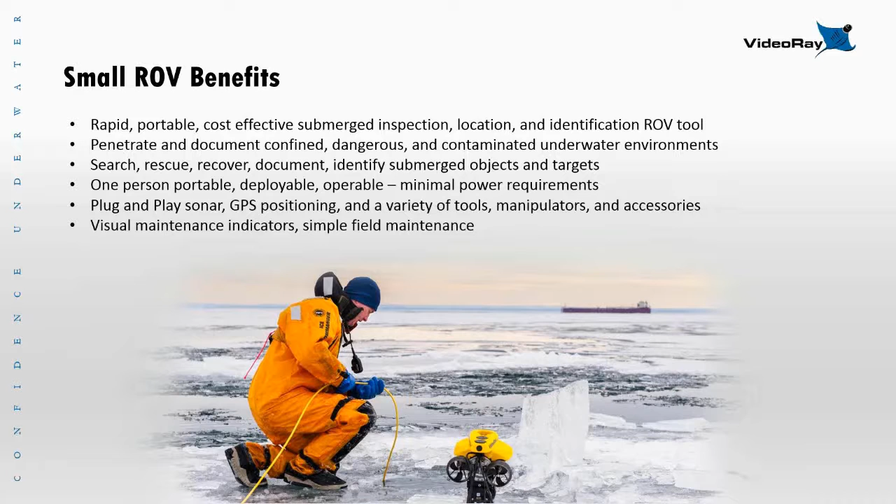An example is the cartridge seal, which is the oil-filled seal that lubricates the motor shafts. It's visually identifiable - you'll know when it's time to change it, and changing it takes a matter of seconds. So we pride ourselves on the ease of maintenance of our vehicle.

The third one is a new ROV configuration that we've put together. We're calling it the Voyager, and it's going to live in our economy line. So we're going with the Scout, Explorer, and the Voyager, and you can probably notice the theme we have going there. So we're kind of bridging a gap in performance and price between our economy line of entry-level systems, the Scout and the Explorer, and our top line Pro 4 professional system. We'll go into that in greater detail as well.

We'll start with the rotating manipulator. Many of you know, if you're familiar with our systems over the last 15, 16 years, that we've had our single axis manipulator - varying opinions on that. So needless to say, we're very excited to have something new and much more capable than our good old buddy there, the old manipulator. This was designed, as was the old one, by Inuktun.

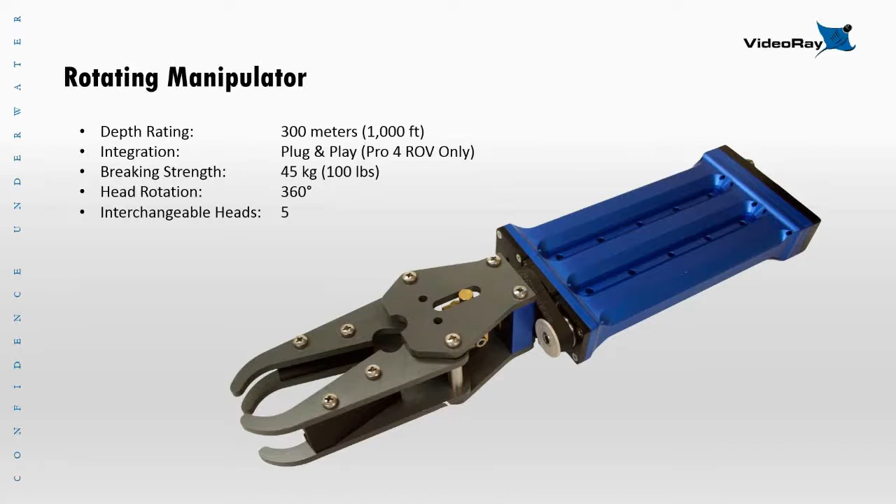So we'll go through those heads now. Starting on the left, and the interchangeable part, you'll see there's 4 screws involved, and then kind of an Allen key. So I've switched out all 5 heads, and each head probably takes 2 to 3 minutes to switch out. You can do it out in the field, so it's not very difficult at all. It's a Phillips head screwdriver and an Allen key, which come in the kit for the manipulator.

Right now we're selling this as an entire kit, which is the body and all 5 heads. I will talk a little bit about pricing at the end, and how we're trying to figure this out since it's very new to us. Are we going to sell it with 1 head? Are we going to sell it with all 5 heads? We're always trying to be flexible and meet our customers' needs, so with your help, we can probably get that dialed in.

On the left is a parallel jaw. It's kind of similar to the old head that we had on our manipulator. Simple open and close on that one.

Moving to the right, we have the V jaw. It consists of 4 kind of fingers there that interlock and opens very wide. The difference between that one and the parallel jaw is how far the heads are opening, and I've got specs on that on the next slide, but let me get through these basic overviews here.

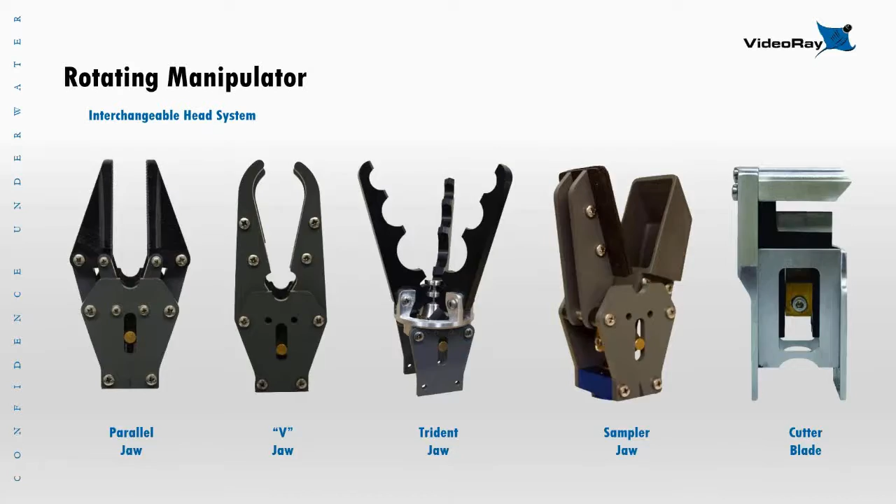Here's some of the specs, and again, I'll make this presentation available afterwards so you can look at this in more depth. Or you can visit our website under the options and product tab, and download the spec sheet for this manipulator—all of this is on it.

You can see some of the closing forces for each individual head. The sample size—you can pick up 45 milliliters with the sampler. The opening on the cutter blade is about 1 inch. Now, I don't think we're getting through 1 inch of steel cable with that, maybe some much thinner steel cable. I've yet to really play around with that one myself, but I know we can get through thick nylon rope and stuff like that. The thing is really beefy.

Feel free to go to our website and download the rotating manipulator spec sheet, and all this information is on there.

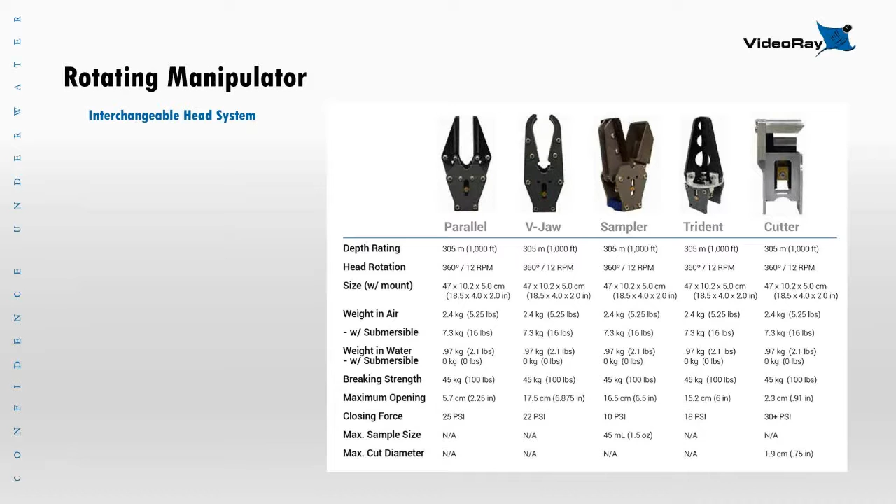On the left here is showing how we're working the rotation. We have the same open and close features, which your right hand, forefinger, and middle finger will still operate, as it did with the old one. But we've added the rotation of the manipulator head into that 3rd axis on the joystick—so it's not moving left and right, but twisting clockwise and counterclockwise.

To operate or engage the rotating feature of the manipulator head, it's very simple. While piloting the ROV with the joystick, it's a simple left or right if you need some rotation feature there. Works really good. I've used it a few times now, and it's something to get used to, but if you work with it in a pool for a little bit, you can really pick it up quickly, just like pretty much everything else on VideoRay.

I wanted to point out with the image on the right that this is compatible with the imaging sonar head. If you want to put it on with an imaging sonar head like the M900 BlueView, we do have an extra flotation block that's necessary to put on there. It's just a couple of screws on the bottom into the skid, giving you the correct ballast and trim in the water, because the rotating manip is a little heavier than the old one. But there's nothing we can't ballast correctly with the tools we already have. So the only one that requires more is the Blueview—just that blue kind of block you see there. So yes, to answer those questions, it is compatible with the imaging sonar, and also the Micron or the Sea Sprite and things like that. So it plays nice with everything.

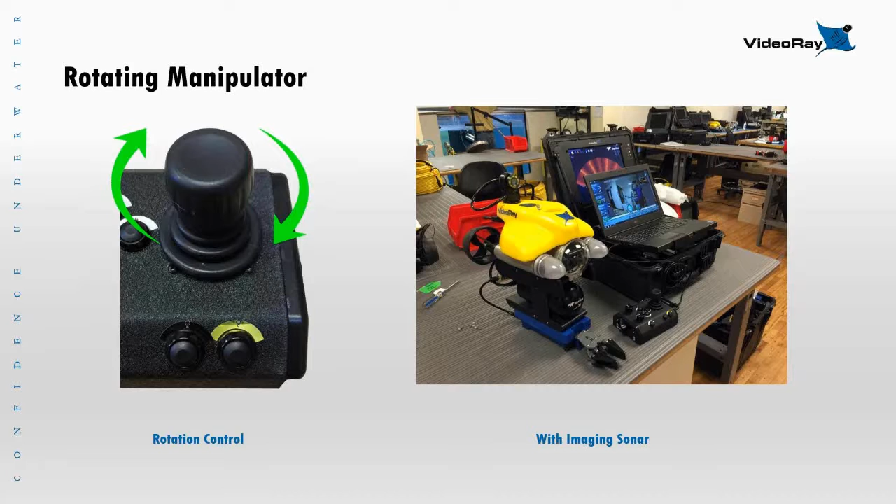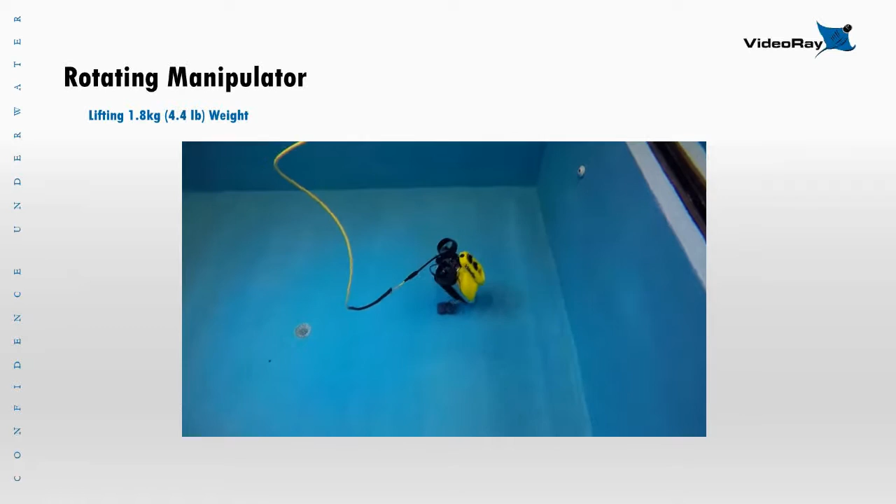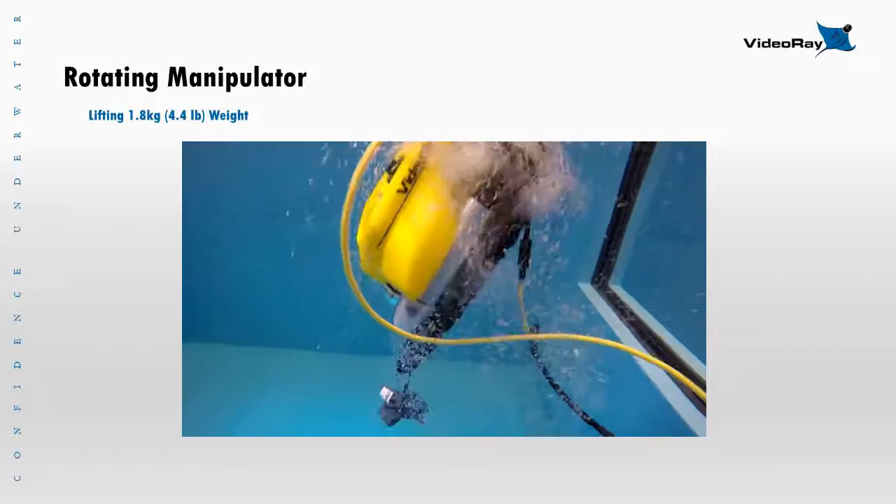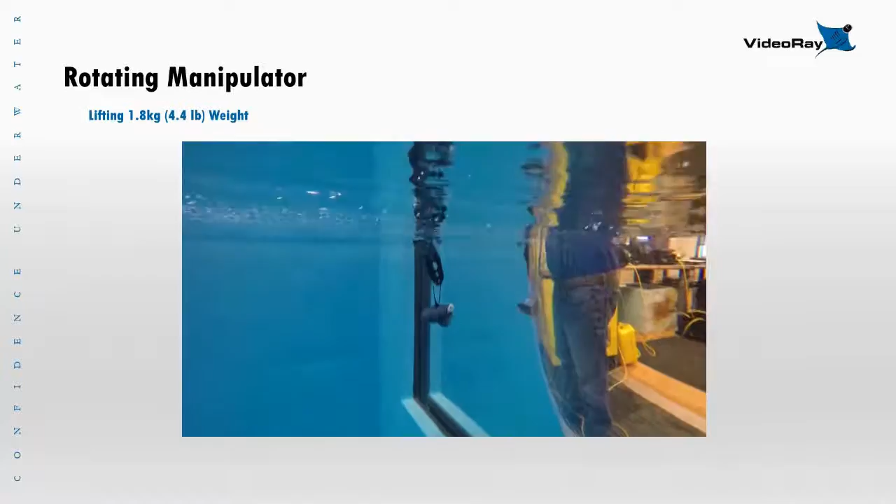I had two little short videos on the rotating manip. We had to meet a spec for a tender that had the ROV picking up at least—the spec was 1.5 kilos, but I pushed it up to 1.8 and used the new rotating manip to actually pick up some dive weights that maxed out at 1.88 kilos, 4.15 pounds, which is quite a bit for our system. I did this in our tank downstairs using the rotating manip. These are just lead dive weights with some zip ties on there, but I'm also using a ballast technique and the horizontal thrusters to lift that instead of the vertical motor, which isn't powerful enough to lift up that much weight. We did use—and you can see there I'm holding that weight at the surface. So this was a cool test. That's probably about the max weight we can pick up under just the ROV power, so that's a neat spec for the size of our system. I was pretty impressed that we could get that much weight up, and there's a view of our shop here.

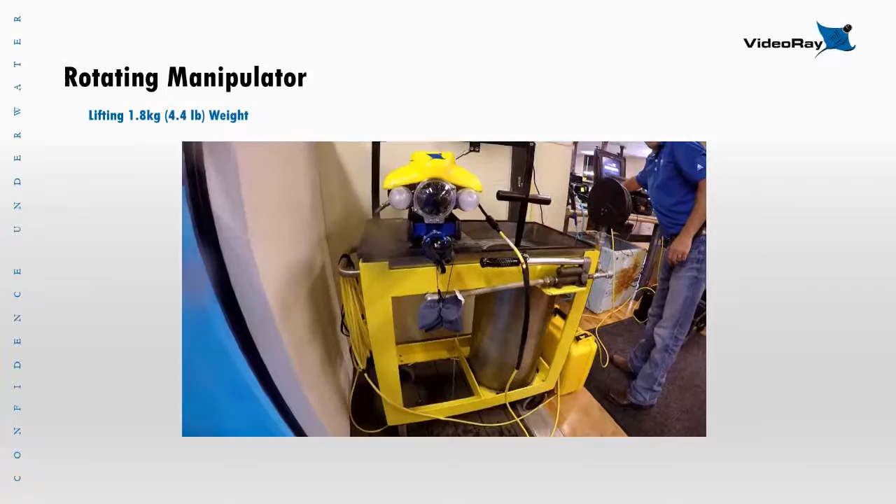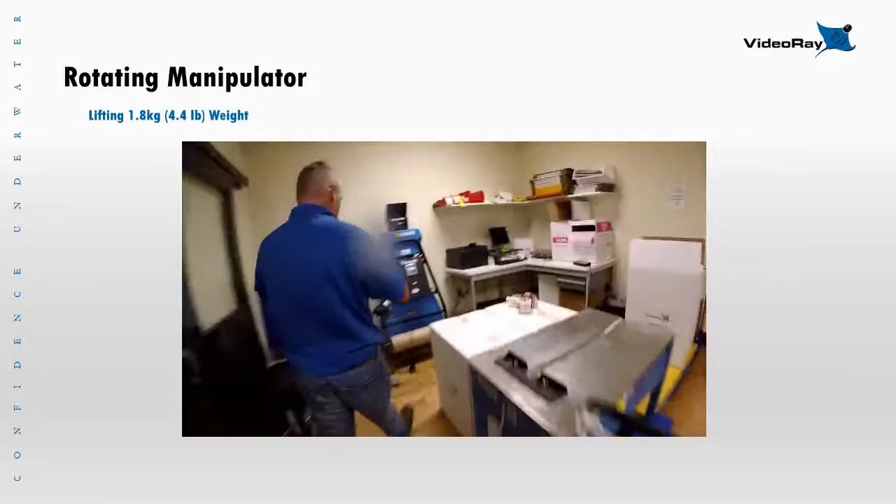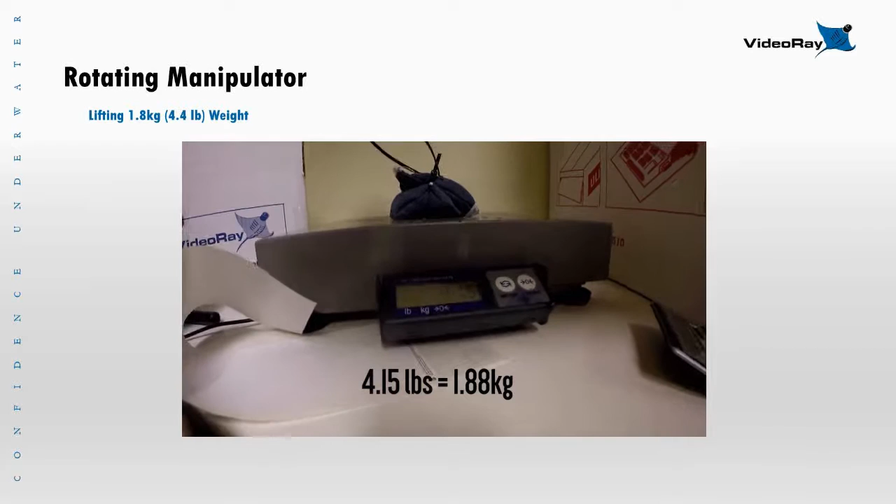You can see me—I'll take it over just to prove that it is that much weight. Sorry if the video is a little jumpy there; I'll clean it up at the end and resend it so you can see it working in real speed. That's our scale and our shipping area there, in pounds. So I thought that was pretty cool.

Okay, that's the rotating manip. Again, you can come to our website—there's a whole page on it. Everything I mentioned is in writing form, and you can download the spec sheet, and so on and so forth.

All right, we'll move on to our second new product. Like I mentioned before, it has been around in a couple of different forms with some of our ROV tinkerers out there. This one was put together in a package by a fellow named Patrick Rowe—he's Midwest ROV—who designed and put this kit together, and it works so darn well that we really want to start promoting it more. I'll show you some videos of successful recoveries completed by Craig Thorngren of Submerged Recovery. He's out in Washington State, and he's picked up crazy things with this recovery toolkit, and I'll show you some examples of things he's picked up with this kit. So thanks to Craig and Patrick for some of the content here.

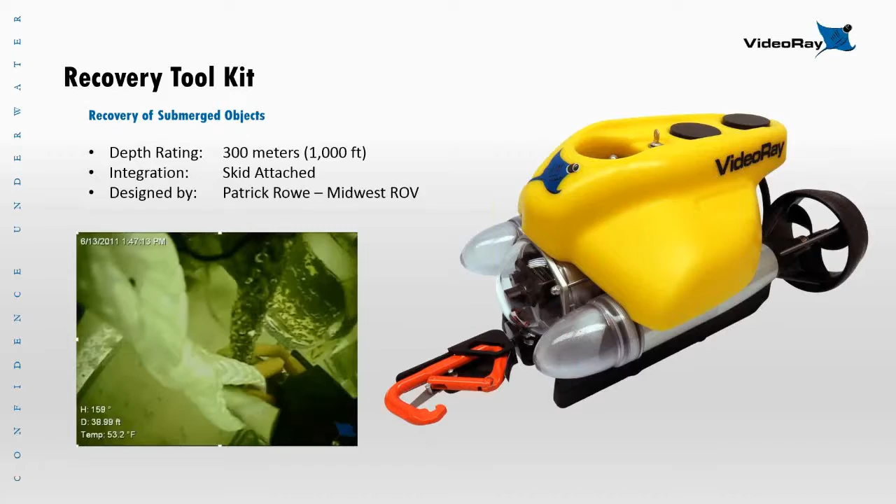So what are we doing with this here? Now there's a lot of different kinds of tools in this kit, but I'm going to focus on one called the 2T recovery tool. Very simple but extremely effective tool in this kit.

But what are we doing overall with the recovery kit? We mentioned that we're able to pick things up to about 100 pounds if we have a good grip with the regular or rotating manipulator, bringing it to the surface by pulling the tether up, hand over hand, muscling it up. And what if we have something that's too large, we can't get a good grip on it, and we need a much more formidable rope or line on something to get it to the surface with either a crane or some kind of winch, launch and recovery tool.

So what we're doing with the 2T recovery tool in this kit is attaching a separate line to the target item, the submerged item, that we can recover with a LARS or a crane, something like that. We're attaching an external line that's flying down with the VideoRay, attaching either the carabiner or one of the clips to the submerged object. We're backing away, so now we're free of our line, and we can stay down and have a visual of the recovery. That's kind of the steps involved with the recovery toolkit.

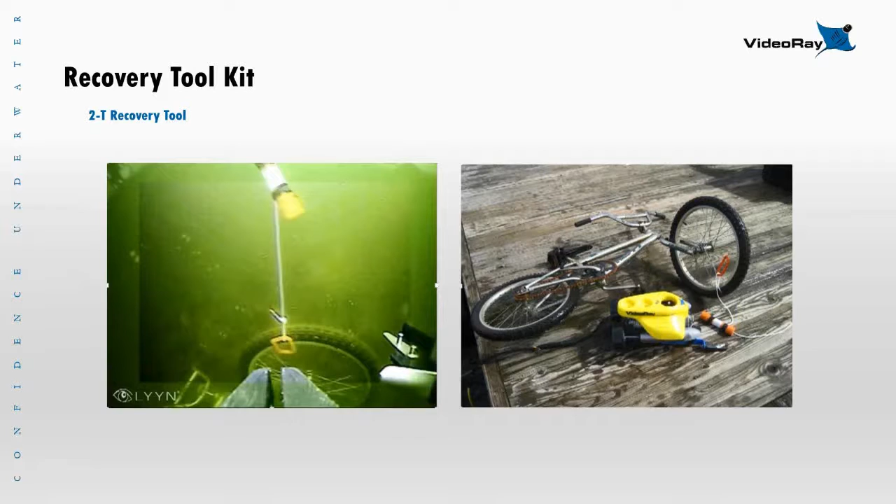Thanks. Here's a close-up of it. It's a very simple device, but this was put together very well by Patrick. You can see the machined clamp there, with the carabiner that's inserted in it, and basically you're using the spring motion of the carabiner there.

You're opening it up and just closing it. If you can see my cursor there, you're just pulling this in and closing. So when you've found what you want to recover and found a good spot to get it on, you simply insert the line or whatever the structure part is. This snaps, this closes, and the whole carabiner and line pull apart from the recovery tool. So very simple, very slick, yet very effective.

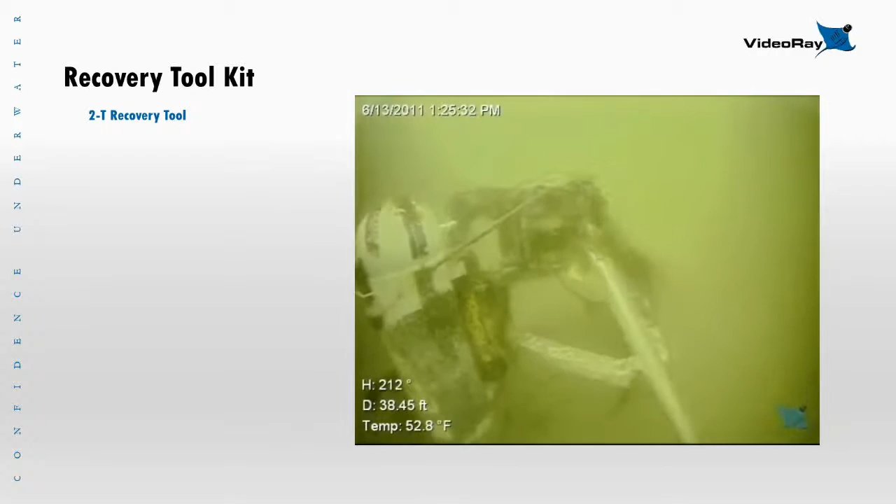So you can see they've located the item there, which was done with sonar, BlueView sonar I believe. The next step is to find a good point for recovery, and it looks like there's some rope on there already. So he's now attached his recovery kit, and you can see the line attached there to the carabiner, which is loaded and still trapped there. So I've identified the point there, and I believe there's some good rope on this already that we could get around, or that Craig could get around to attach the line.

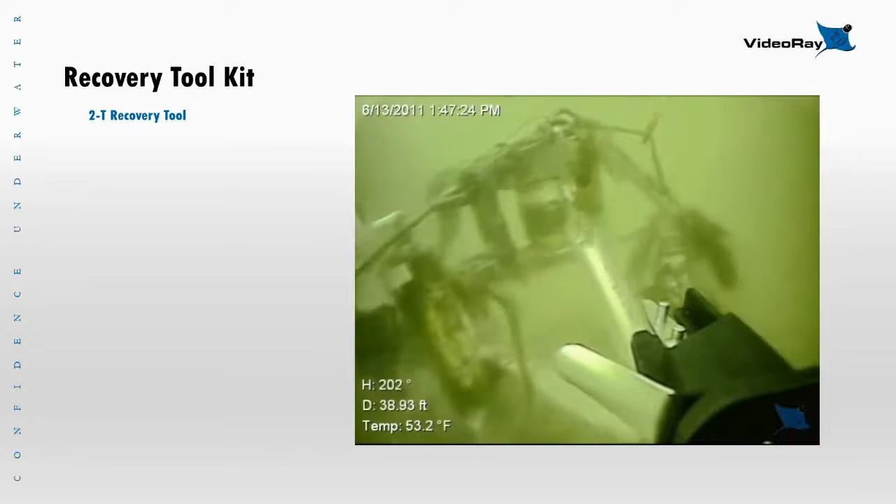With some good piloting, he's going to get up on the system there and get his carabiner caught around it, go full flaps reverse, snap off. So now you have the recovery line on the system. They had some kind of winch or LARS on the workboat they were on. So you can see there that float was designed to keep the line away from the thrusters.

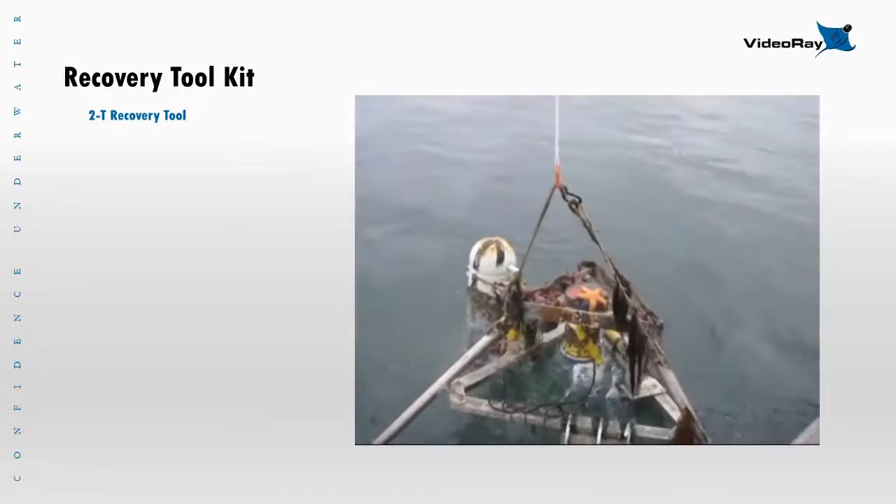Looks like they're locked on good, and they pulled this up, and I believe there's a picture of it coming up here. I can't remember the weight of this. I'm guessing it was over 100 pounds. But you can see they're using their LARS to recover their system, and there's proud Thorngren with his tools and his gear he recovered.

So good video there to show the simplicity and the effectiveness of this tool. Here's just a few more things he recovered. I think that bike is in there, and some other stuff. Craig likes to pick up sunglasses and cell phones and all kinds of things. So this was the bike.

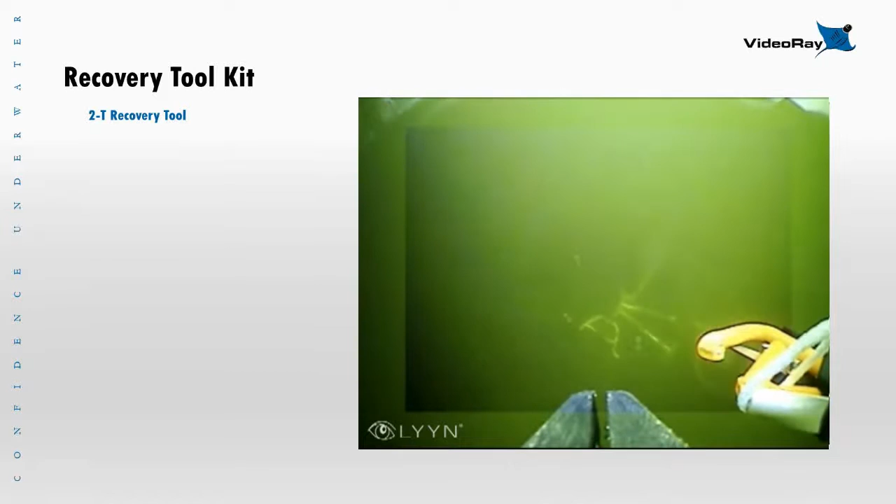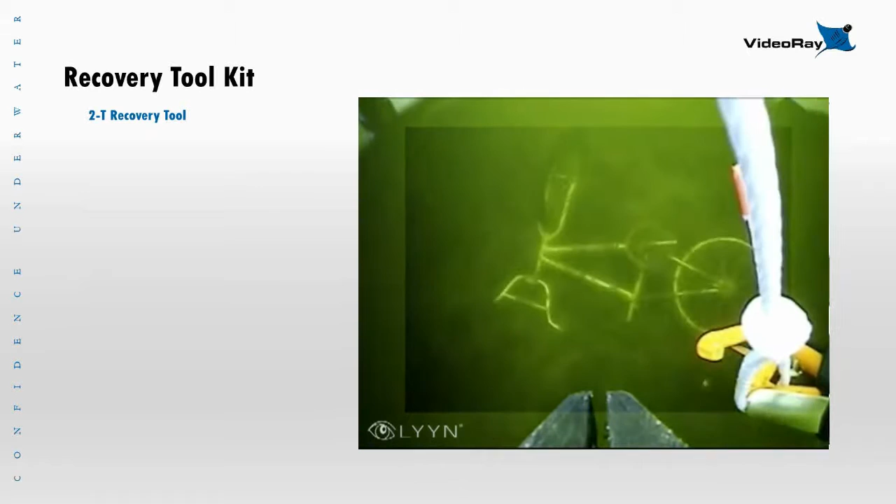So in this one, he's got the recovery tool side mounted. The good thing about this is that you can mount it in a bunch of different places on the ROVs. Obviously, you'd want it in the view of your camera. So here he's got it side mounted, so he has both ability to use his old manipulator and the recovery kit as well. So getting a bike up is probably perfect for this. It looks like a lot of different places that you can snag your carabiner onto.

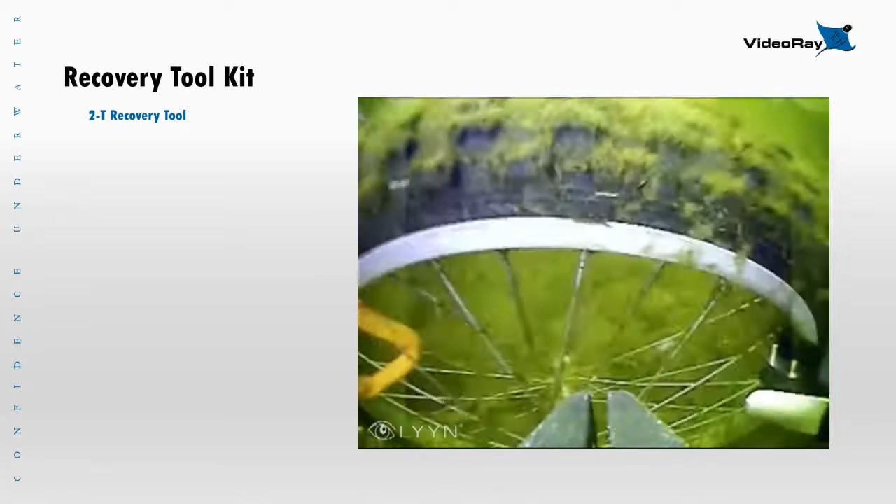But now Craig has done a lot of recovery of not only this type of stuff, but also drowning victims as well. And he's crafted all kinds of little tools for this, and I'm sure he'd be happy to talk to you about them. I'll give you his information afterwards as well. Snares for drowning victims that are just too deep for divers to get to. Snares that you can wrap around some sort of limb or something to make drowning victim recovery possible at depth.

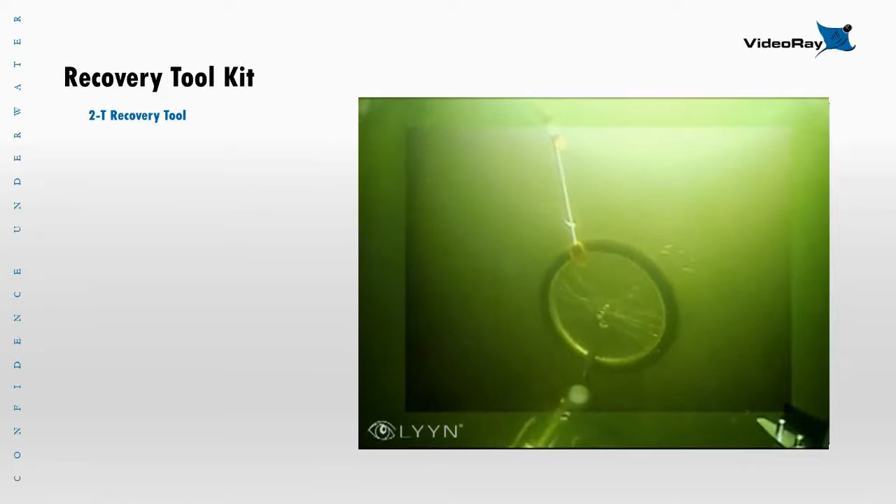Now you can see here the bike coming on up. There she is. And I think now he's just on his manipulator picking up cell phones and beer bottles. And so the manipulator is a handy tool, to say the least.

I'd say it's probably one of the most essential tools to have on the VideoRay, and you don't have to buy the Pro 4 system with it right off the bat. It's something you can add at a later date, and obviously the same as the recovery toolkit. So something to think about if you're getting ready to purchase a system.

The ability to upgrade at a future date is as simple as just purchasing that item. You don't need to send it back to the factory. We don't need to install anything for you. It's there when you need it.

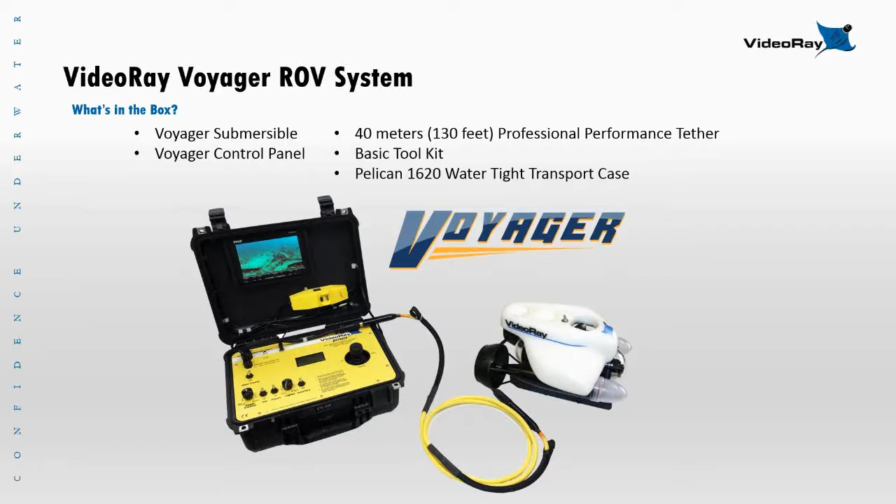Sometimes you can get the Explorer or the Voyager control panel inside the same case as the sub. So it basically gets you down to your tether, which is less than 10 pounds, and your sub case.

So a little bit more about the submersible itself. We went over the depth, speed, and the submersible weight is around 6 kilos or 13 pounds. That's with full ballast weight in it. So depending if you're working in salt or fresh water, that can change.

Same camera as our Explorer, the 570 TV lines with a 140-degree diagonal view, so very wide, underwater optimized camera. Again, there's a depth sensor in this sub that can give us our depth on the LCD readout of the panel. We have the variable intensity 20-watt halogen lamps, so you can turn them up and down as needed. The same skid ballast weight system as all the subs, so no tools required. You pop open the hatch there, add or subtract weight as necessary to get your trim characteristics right in the water.

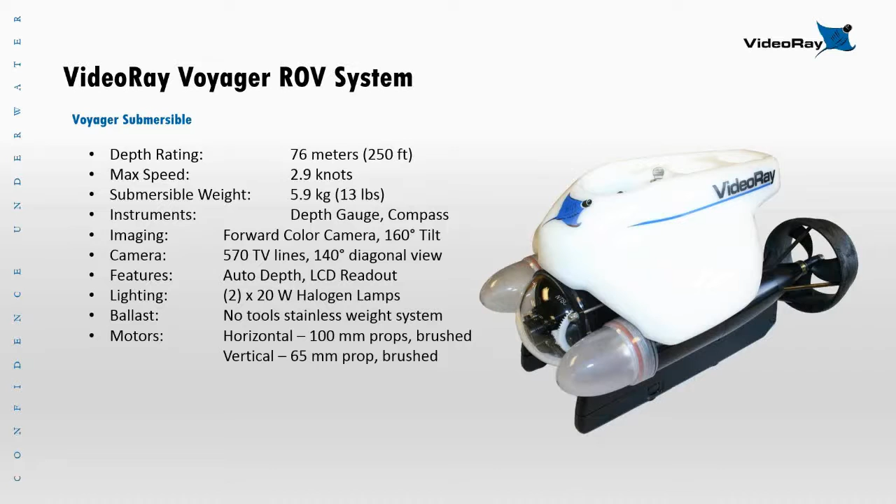And the motors, the horizontal, we have the 100 - I think it's 90 millimeters, but they put 100 millimeter props on there. Not a huge difference. These are the brushed motors that were in the same Explorer system, if you're familiar with that. We also have increased the size of the vertical prop.

Panel, again, Explorer panel - we've done some new graphics on it for the Voyager branding. So you're still getting the 7-inch color monitor there. The LCD readout in the middle is going to show your depth, your compass heading. It's going to show your auto depth feature as well, and it's going to show you if any of your third axis features are on or off.

You can read more about that in the user manual, which is online.

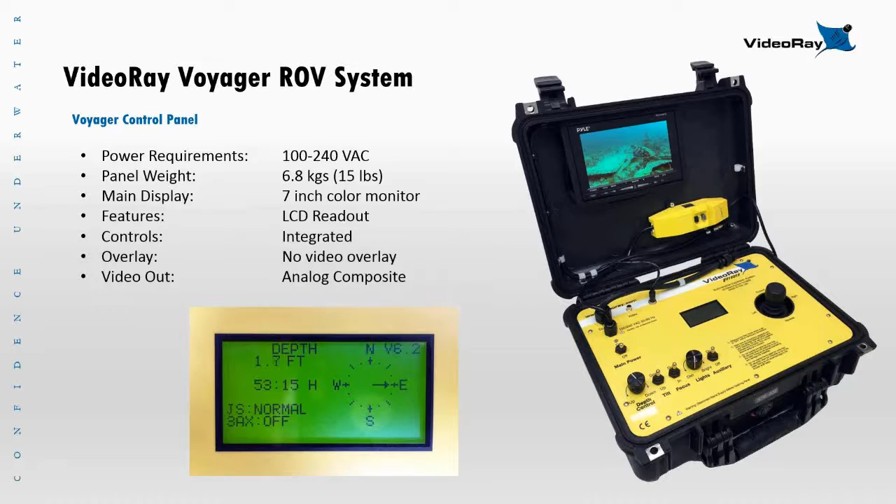There's no video overlay in the Explorer, Voyager, or Scout systems, so your depth is right there in front of you on your panel, but it's not superimposed on the video that you're getting on your color monitor. And speaking of video, it's the same analog composite out video jack. Here's a little close-up of the panel, and that's the case to the right.

That's not included with the Voyager system, but I just wanted to show you the possibility of that. The tether backpack is for sale online in the VideoRay store, and I'll explain the store a bit more in a second. But if I didn't have that backpack, I'd have the one small coil of professional performance tether, which you can wrap around the handle or just carry over your shoulder.